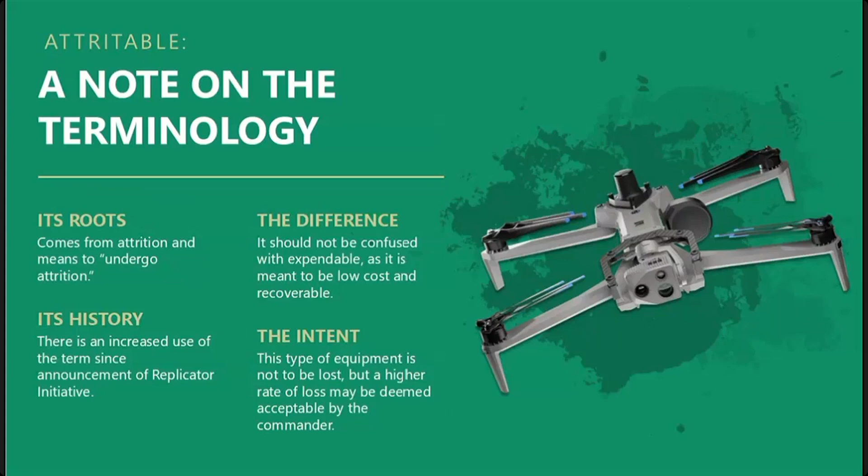A little note on the terminology: the term attritable has been used recently to describe a new class of unmanned platforms, particularly in light of the Replicator initiative. The root of attritable comes from attrition, a common military strategy meaning destroying an opponent's forces faster than they can be replaced, while ensuring one's own rate of loss remains bearable. When defining these unmanned platforms, attritable should not be confused with expendable, as they're meant to be low cost and recoverable. The intent is not for the equipment to be lost, but to have a higher rate of loss that may be deemed acceptable by the commander.

Operations in the air domain are critical to the U.S. military defense strategy. Starting in the 1990s, the military began to replace manned aircraft with unmanned aircraft, also referred to as uncrewed aircraft or UASs. Unmanned aircraft remove the danger of putting a pilot at risk of injury, capture, or death. They can be deployed for longer durations in dangerous settings, and they're typically cheaper than manned aircraft.

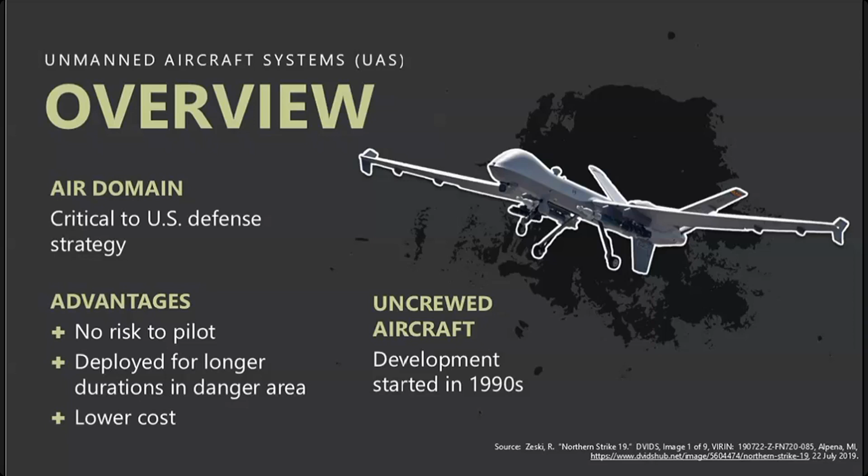For the United States to be able to protect the nation if forced to engage in a near-peer fight, the need for attritable UASs that can be deployed in the battle space to affordably accomplish their missions increases. The DoD is currently in an experimental phase of developing concepts for attritable unmanned system employment, and the efforts are primarily centered in the U.S. Army and the U.S. Air Force.

A lot of these drones are typically used for ISR missions in a variety of ways, but they're also used for loitering munitions, counter drone assets, and air power support. For cost overview, they usually cost between 2 to 20 million. The U.S. Air Force has created a nice definition for this, describing them between expendable drones that are one-way flights versus sophisticated drones used for a multitude of years.

Hi everyone, and I should first thank the team for an overly kind introduction. That was a little bit embarrassing on my part, actually, but I would also be remiss if I didn't mention that I'm currently directing research at Blue Path Labs.

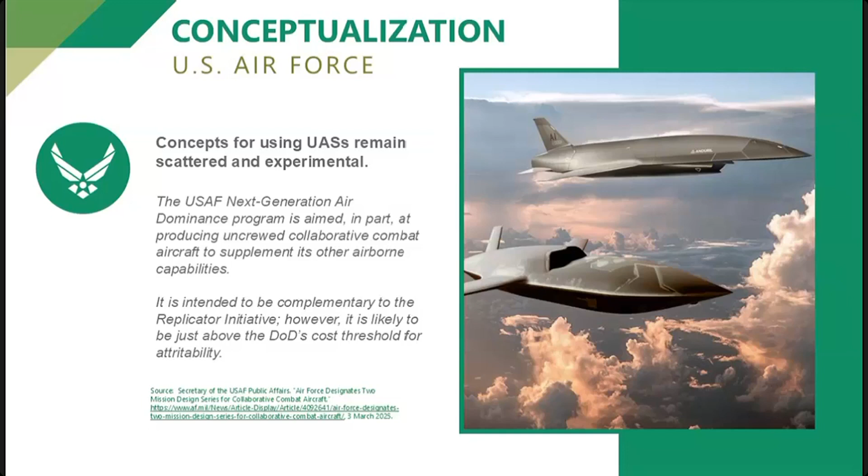The Navy and the Marine Corps, by their own public pronouncements, are the furthest behind in terms of conceptualizing how exactly they want to use attritable unmanned aerial drones. They do currently fly a few, and they've issued requests for information on potential new platforms, but for the moment they seem more focused on surface and underwater platforms. Oversight of small drone use resides in the Naval Air Systems Command for both the Navy and the Marines. The US Marine Corps aviation plan does not mention small tactical drones at all - it's not something they've worked into their doctrinal document production.

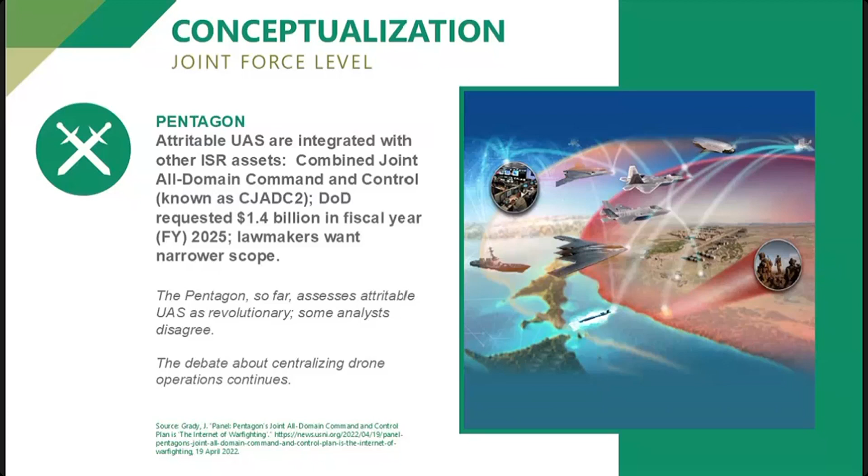Let's go to the next slide, please.

There is another debate going on largely between the Pentagon and Congress, and to some degree within the Pentagon itself, as to the degree to which the use of small attritable drones should be centralized within the department. In 2024, lawmakers hoped the Pentagon would designate a new single go-to senior official to oversee this suite of pursuits regarding small drones. In the draft fiscal year 2025 defense policy bill, there was a call for the Army to establish a dedicated drone corps, but others within the forces argue we're not quite there yet in terms of centralizing things to this degree - it would be better to leave the service branches and various laboratories to experiment with different ways of using and incorporating them into mission needs. That's very much a debate that seems to be live, at least.

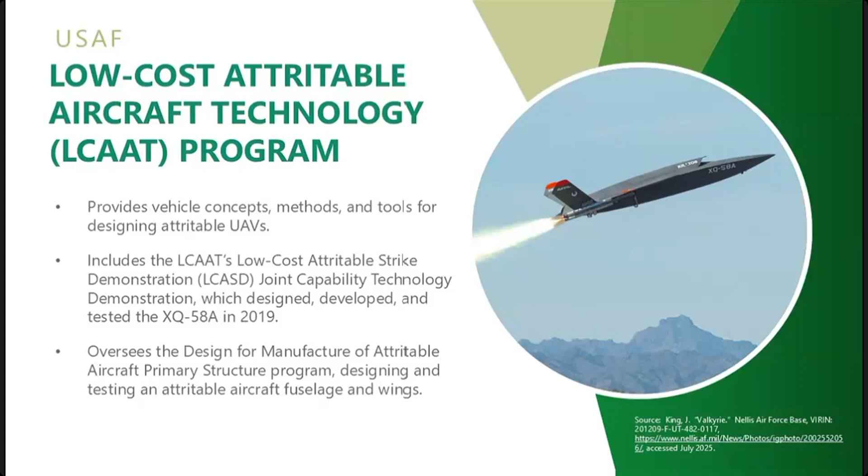Other programs also seen within the United States Air Force include the Offboard Sensing System, or OBSS. It was originally created under AFRL, and aimed to use sensors to extend range and sensing during missions, prioritizing human life, which Deanna talked about a little in her intro regarding attrition and attritable definitions.

It also aimed to demonstrate an open architecture UAV to help meet the goal of rapid time to market and low acquisition cost. OBSS also aims to build future iterations from common US government-owned system architectures, allowing for quick adaptations.

AFRL also partnered with Kratos, which we'll have more information about in a couple slides, to develop OBSS. It's not really expected to be in service for an entire lifetime, but will meet near-peer adversary threats. This solution from Kratos is aiming to be offered close to about $2 million, and they still say it will provide a high performance versus cost system.

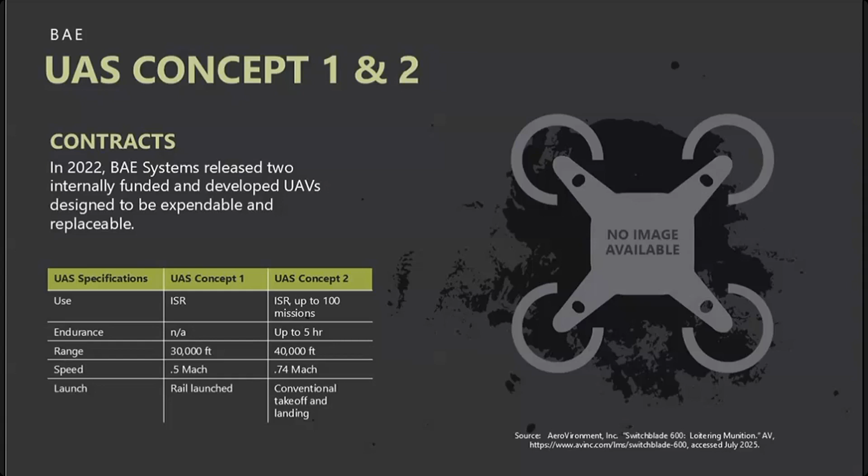Boeing offers the MQ-28 Ghost Bat. This was previously Boeing's ATS, or Air Power Teaming System. Then when they signed a contract in 2024 with the Royal Australian Air Force, they switched gears and started calling it the MQ-28 Ghost Bat. The cost is $2 to $3 million per system, and it's designed to work as a smart team with an existing military aircraft to help complement and extend missions. Boeing suggested it can be used on the front line when teamed with manned aircraft for ISR missions, and is about 38 feet long and can fly up to 2,000 nautical miles.

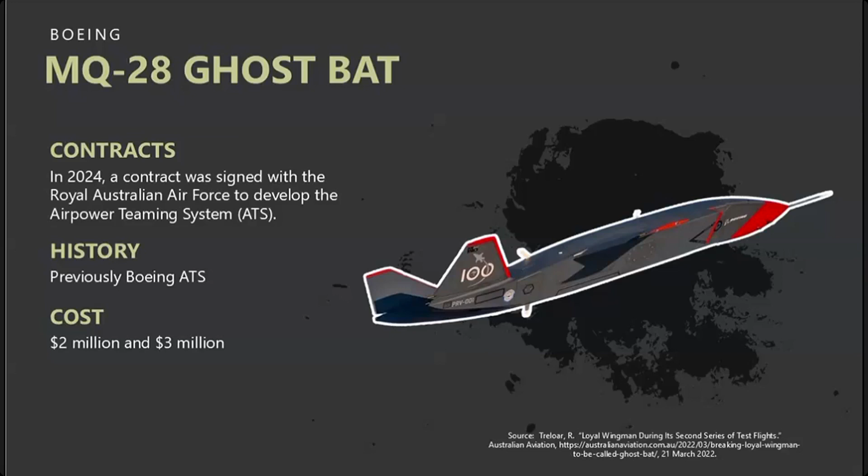The next few slides are General Atomics. They offer a few different attritable systems. The first one here is the Sparrowhawk. They actually have two attritable drones under their air-launched effects program, both with the goal of being able to launch the drones from other UAVs, particularly the MQ-9 or something similar, or helicopters. They offer the Eaglet, an expendable drone designed for single use, and the Sparrowhawk, intended for multiple flights and missions. One intended use is to strike targets found by an attritable drone fleet — again, ISR missions. It can provide collaborative autonomy for kill chain closure, can distribute and disaggregate sensors across the battlefield, and operate below weather sensor coverage, etc. The cost for this system was not disclosed.

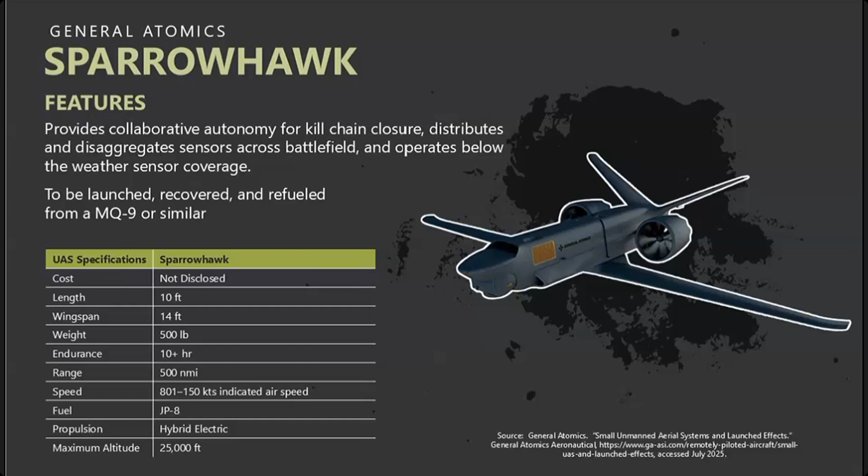General Atomics also has their Gambit system series. This was awarded a $17.8 million contract in 2021 with AFRL's OBSS program. They debuted it in March 2022. Not much more information to be included, but it is hoping to look like a mini fighter jet purposely, so it will be able to operate in contested environments, long endurance ISR, air-to-air combat, high fidelity trainer, and combat recon.

Then we have General Atomics' XQ-67A. This is an autonomous collaborative platform successfully tested in February 2024. It stems back to the LCATS program that provided technology and research to the OBSS program, which resulted in this development and testing of the system. It aims to use a common chassis approach for its design and allow other UASs to be rapidly replicated on a standard genus chassis.

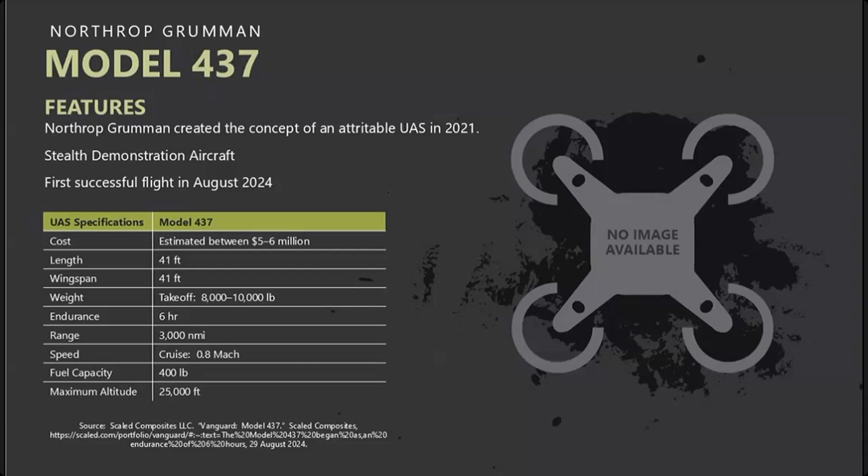Next, we have Yates Electrospace Corporation. They offer their Silent Arrow Contested Logistics System 300, or the CLS 300. It's a long-range powered cargo attritable UAS that can conduct supply missions, overland delivery for contested environments — essentially, it's in the name. Propulsion and flight tests were conducted in late 2024. It can also take off from multiple ground surfaces, including naval vessels and unimproved surfaces, and can also be released from the air. They were awarded an SBIR contract of $1.8 million from AFWERX to design and test the CLS 300.

So on to Skydio. I know you heard Eric mention Skydio. They are a huge player in the drone world. I'm sure most of you have heard of them. Skydio offers the X10D and X2D.

A general comment, Skydio's drones have been used for every type of mission you can think of, for every branch of the DoD, Five Eyes militaries, and also throughout NATO.

The X2D also won the Army Short Range Reconnaissance Program, their first tranche, and is currently competing for the next one with their new X10D. The X2D was also part of the U.S. Marine Corps Short Range Short Endurance Program and the DIU's AI for Small Unit Maneuvers Program.

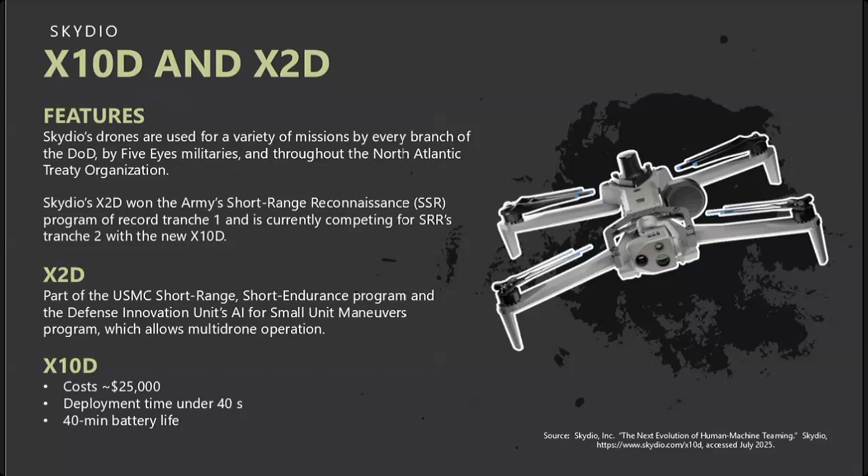So big players in this area. Teal drones have their Teal 2, which they're marketing as attritable. It's an EOIR UAS used for SSR missions, and it's also Blue UAS certified.

Teal is currently working with the Army on possible uses for this ISR drone. They've received a $5.2 million contract to provide 344 copies to the DLA, who is acquiring the drones for U.S. Air Force Security Forces as well. The Teal 2 costs between $13,000 and $17,000.

In chatting with them recently, it was interesting to note, especially with the Replicator Initiative and rapid development, that all these organizations are trying to ramp up prototyping, development, and supply chain. Teal's current production capacity at the beginning of the year was between 100 and 200 drones a month, averaging 1,800 yearly. But they've ramped up production to meet Replicator's demands, and they are targeting 1,000 drones a month with their current facility, also anticipating adding additional facilities to help reach this goal.

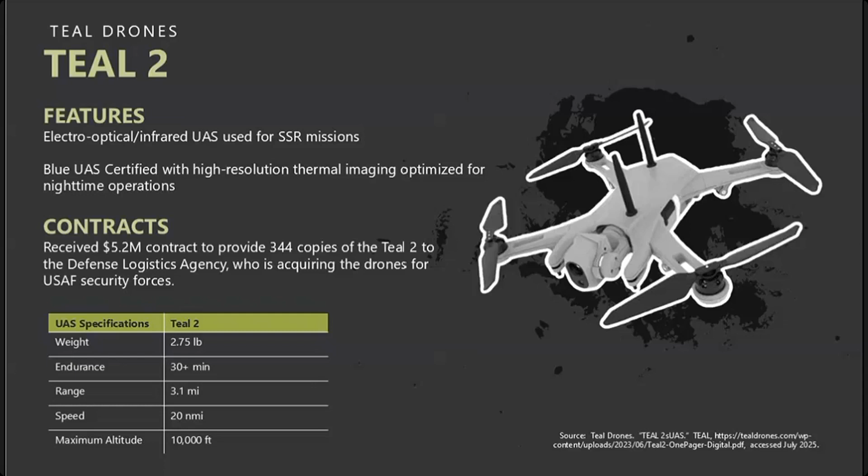QinetiQ has the Jackdaw. There's not much information out there, they're kind of tight-lipped. I chatted with a couple of representatives from QinetiQ. They are aiming to have this be an attritable drone used for ISR, electronic warfare, threat representation, the usual. It's being marketed as low cost, though the cost was not disclosed, but disposable as well, so we included it for the purpose of our attrition definition. It has a definitely smaller endurance, 3+ hours.

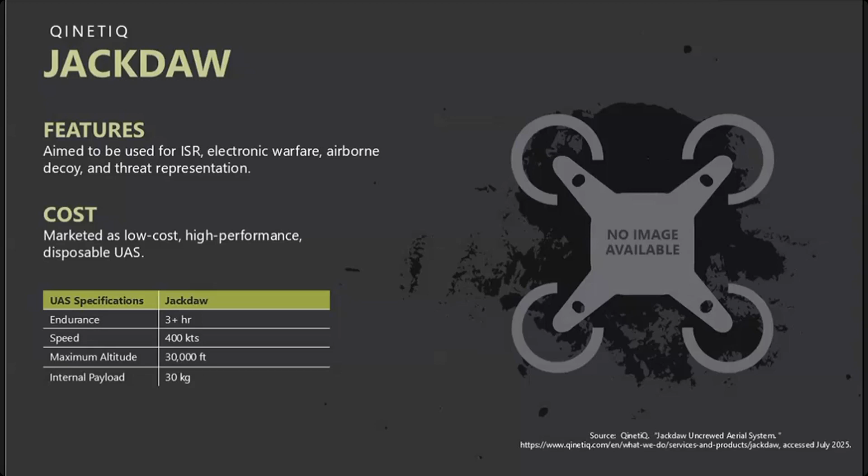Moving on, the Sierra Nevada Corporation has their Launched Effects, or LE, aircraft. This is being described as a low-risk, low-cost, high-value solution for ISR missions that include battlefield delivery, electronic attack, mission reconnaissance, multiple delivery targets, etc.

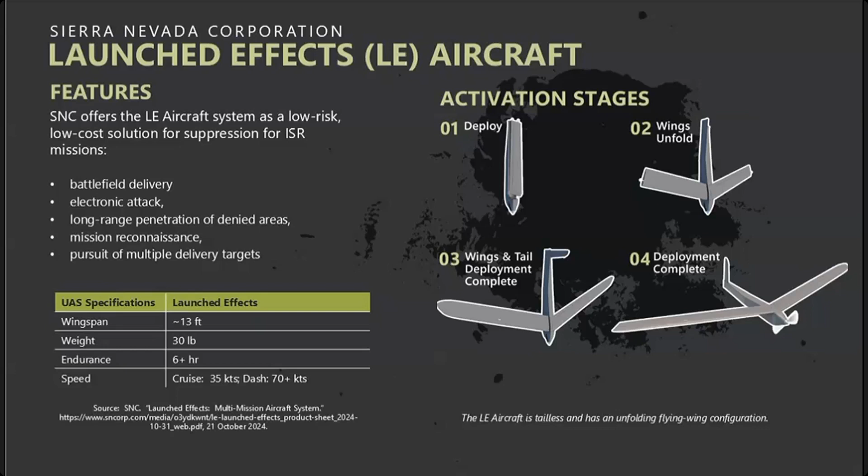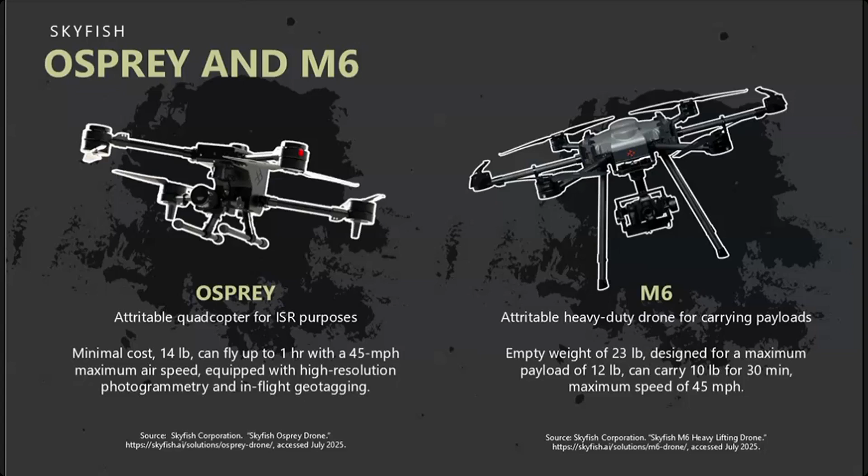So that is a very quick overview of who, on a distro A level, is doing what, important players, important contracts, cost. We're going to end it with everyone chiming in on next steps, what's going on in the future, tying this all together, and then we'll have some questions and answers. So I'll have Deanna and Eric go ahead and chime in.

Thanks, Taylor. As we described, the term for attritable is not set, so in the Replicator Initiative, they are trying to work on solidifying a definition for each branch, but they really haven't set that in stone. And I know they say that $2 million is the lower cost threshold, but it really depends on the mission, the drone, and a lot of other things.

Sure, thanks Deanna. Yeah, so I'll just highlight a couple of things here. I've been looking at the chat while Taylor was presenting as well, and it's clear that the definition question is a complicated one. This was very clear to me in my research for this conceptualization component of the report, that there are attempts to impose a definition for the purposes of procurement and contracting and things like that. I think it's clear just from the conversation here, but also from the larger set of research I've done, that that definition does not necessarily align with what people find most useful.

It also, I should emphasize, does not align with what is actually happening on the field in places like Ukraine and China. There's been some discussion of the blue UAS list that the Defense Innovation Unit has been tasked with generating for American-made drones that are considered expendable. The chatter I've read and heard is that those aren't very interesting to the customers who'd ultimately be using them, for a variety of reasons - they might be too expensive, might not have the capabilities needed, production might not be fast enough, et cetera. So that's something to keep in mind as well.